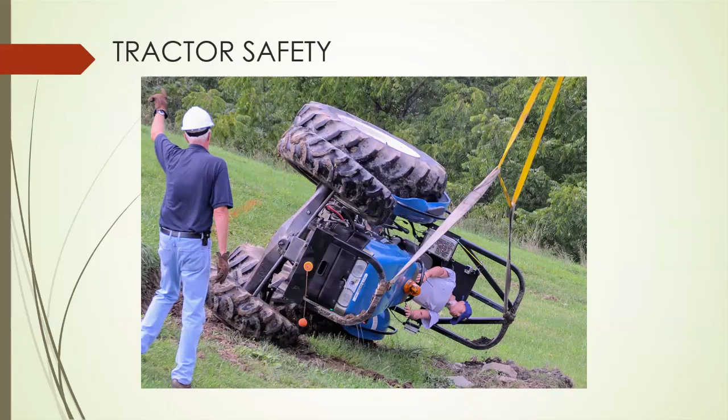According to the National Safety Council, tractor accidents are the leading cause of injury and death among farm workers. Tractors and other transportation related incidents are the number one cause of death on the farm, according to the Bureau of Labor Statistics. Failure to observe safety precautions when operating tractors and attachments can result in serious injury or death. The most common types of serious accidents are the following:

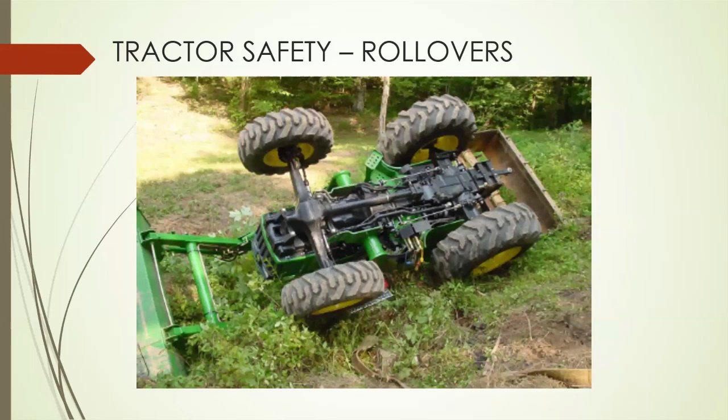Rollovers. The U.S. Department of Labor reports that 44% of farm accidents are due to tractor rollovers. Tractor rollovers are the leading cause of fatalities in the agricultural industry, resulting in approximately 130 deaths per year.

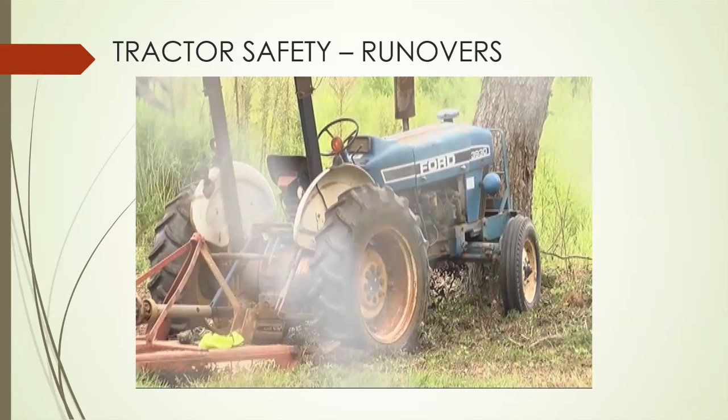The second most common incident with tractors is being run over. This will usually happen when the operator dismounts the tractor to fix a problem and leaves the tractor running without applying the lock brake.

The third most common incident with tractors is being caught in or by moving parts. Many times this involves the PTO, or power takeoff, not being properly guarded.

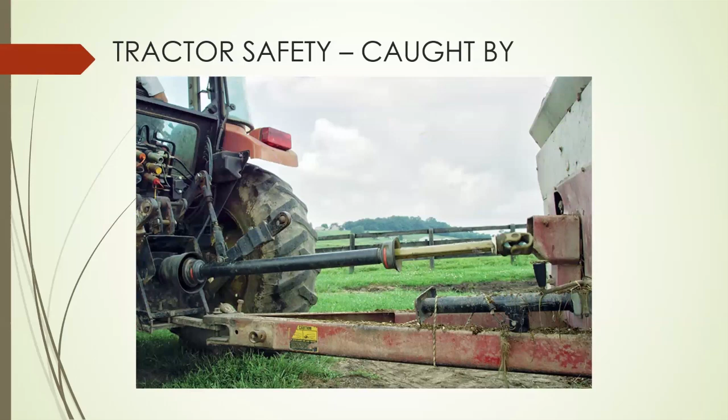Collisions or struck-by is the fourth most common incident involving tractors. Tractors are much slower moving vehicles than automobiles when operating on the highway, and certain precautions must be in place.

Let's familiarize ourselves with the definitions used when related to tractors according to OSHA's regulations under 29 CFR 1928 subpart C.

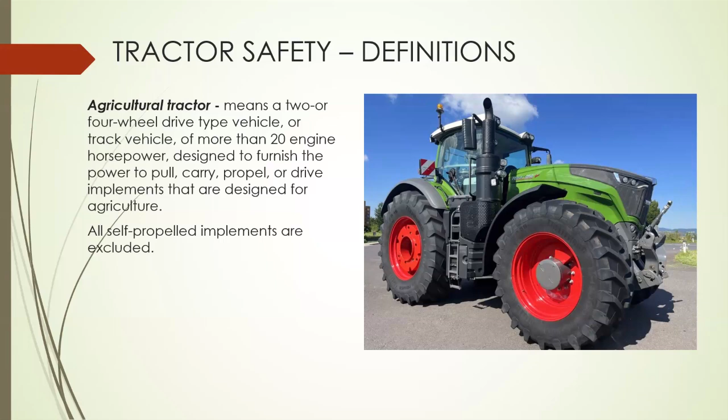The definition of agricultural tractor means a two or four-wheel drive type vehicle or track vehicle of more than 20 engine horsepower designed to furnish the power to pull, carry, propel, or drive implements that are designed for agriculture. All self-propelled implements are excluded.

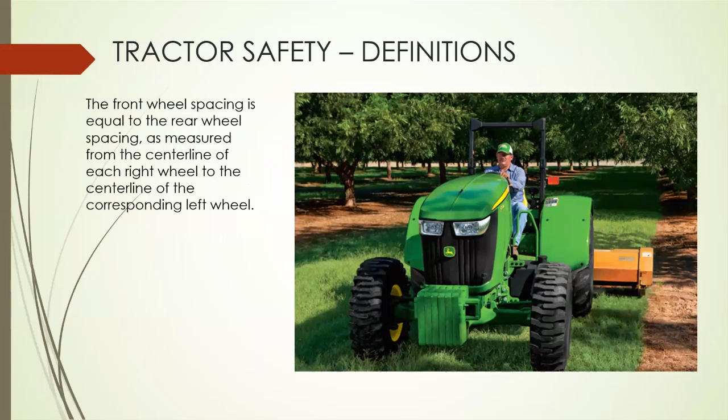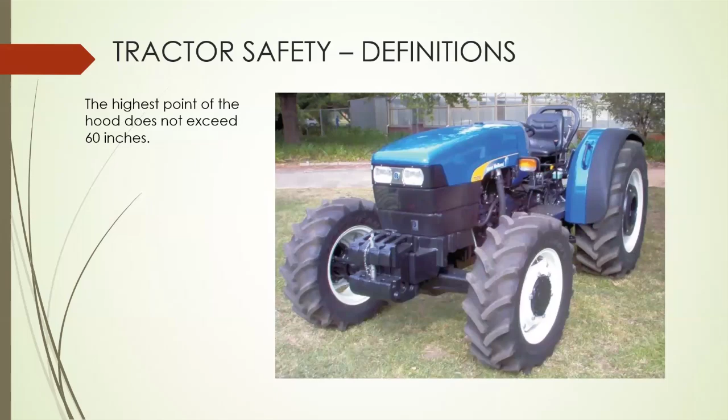A low-profile tractor means a wheeled tractor that possesses the following characteristics. The front wheel spacing will be equal to the rear wheel spacing as measured from the center line of each right wheel to the center line of the corresponding left wheel. The clearance from the bottom of the tractor chassis to the ground will not exceed 18 inches. The highest point of the hood does not exceed 60 inches, and the tractor will be designed so that the operator straddles the transmission when seated.

Now we'll take a look at some general requirements that apply to all agricultural tractors manufactured after October 25th, 1976. The first requirement addresses the leading cause of death with tractors: rollover protective structures. Rollover protective structures shall be provided by the employer for each tractor operated by an employee.

There may be exemptions depending on the type and setting of the work being conducted. If low-profile tractors are used while they're in orchards, vineyards, or hop yards, where the vertical clearance requirements would substantially interfere with normal operations and while their use is incidental to the work performed therein.

Another exemption may be when a tractor is used inside a farm building or greenhouse in which the vertical clearance is insufficient to allow the rollover protective structure that's equipped to the tractor to operate, and while their use may be incidental to the work performed therein.

The last exemption is a tractor used with mounted equipment that may be incompatible with the rollover protective structure. This will include corn pickers, cotton strippers, vegetable pickers, and fruit harvesters.

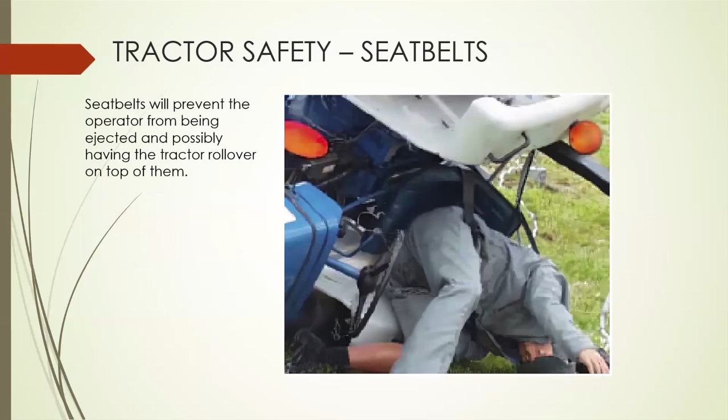Another requirement when operating a tractor with rollover protective structures is seat belts. Seat belts will prevent the operator from being ejected and possibly having the tractor roll over top of them. The employer must ensure that the employee is properly using a seat belt while the tractor is moving so that the operator stays confined to the rollover protective structure area.

Every employee who operates an agricultural tractor shall be informed of the operating practices contained in Appendix A of 29 CFR 1928, Subpart C, and of any other practices dictated by the work environment. Such information shall be provided at the time of initial assignment and at least annually thereafter.

These operating instructions include securing your seat belt if the tractor has rollover protective structure. Avoid operating a tractor near ditches, embankments, and holes. The operator should also reduce the speed when turning, crossing slopes, and on rough, slick, or muddy surfaces.

Precautions should be made to stay off slopes that may be too steep for safe operation. The employer should also inform the employee to watch where they are going, especially at row ends, on roads, and around trees.

The operator shall not permit passengers to ride on the tractor while operating. The operator should also be informed to operate the tractor smoothly with no jerky turns, stops, or starts.

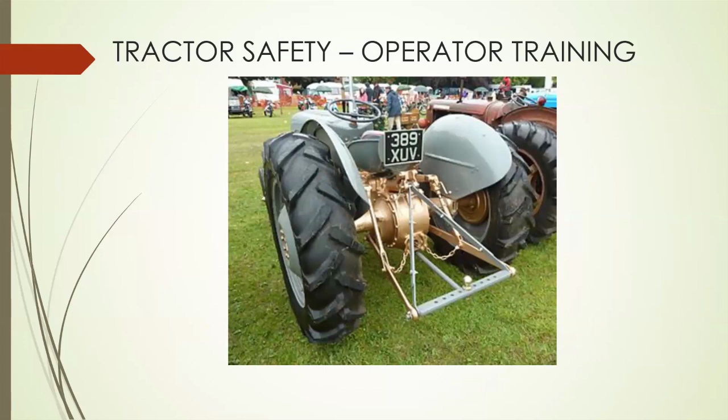They shall also ensure that they hitch only to the drawbar and hitch points that are recommended by the tractor manufacturer. When the tractor is stopped, the brakes should be set securely and a park lock should be used if available.

One of the many uses of a tractor is the ability to power farm field equipment through the means of a power takeoff system or a PTO. The PTO allows the tractor to transfer power to various attached implements and equipment. Tractors used primarily for tasks such as plowing, mowing, tilling, and operating other implements typically come with a PTO as standard equipment.

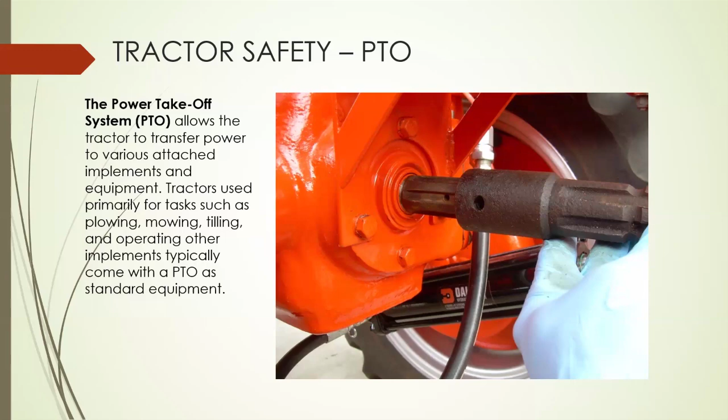The rotational speed of the PTO shaft, often referred to as PTO RPM or revolutions per minute, is crucial for ensuring proper operation of implements and attachments. Common PTO speeds include 540 revolutions per minute and 1,000 revolutions per minute, although variations may exist depending on the tractor's make and model. This type of speed makes the turning of the PTO shaft extremely dangerous.

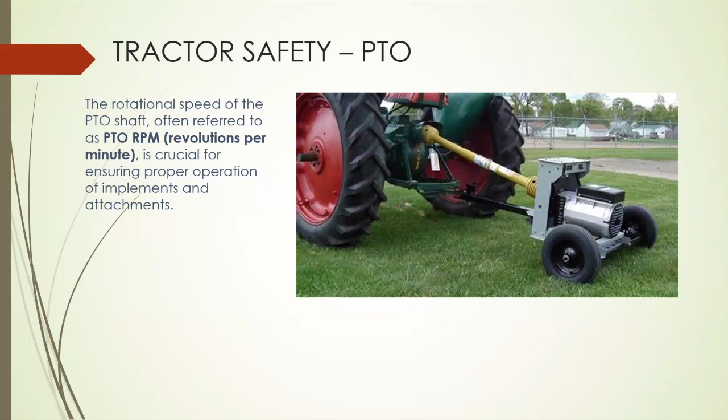Most incidents with PTO systems involve clothing becoming caught in the shaft. Here's a list of precautions one should take when working in and around a PTO system that's in operation.

Make sure that the component is shielded. Regularly test the shields. Ensure that correct drawbar length is used. Always disengage the PTO when dismounting the tractor. If shielding becomes damaged, make repairs promptly or replace before continuing use.

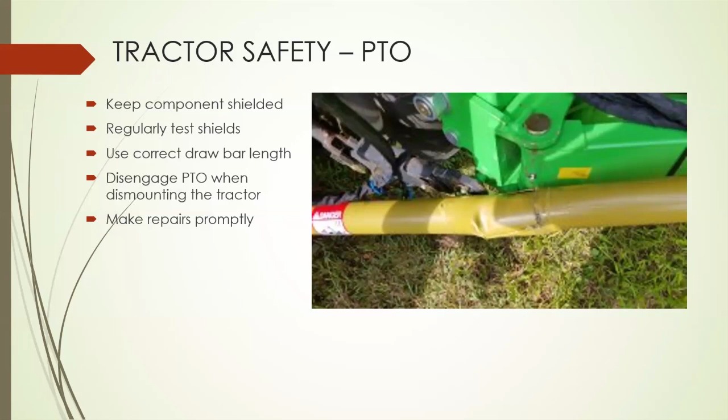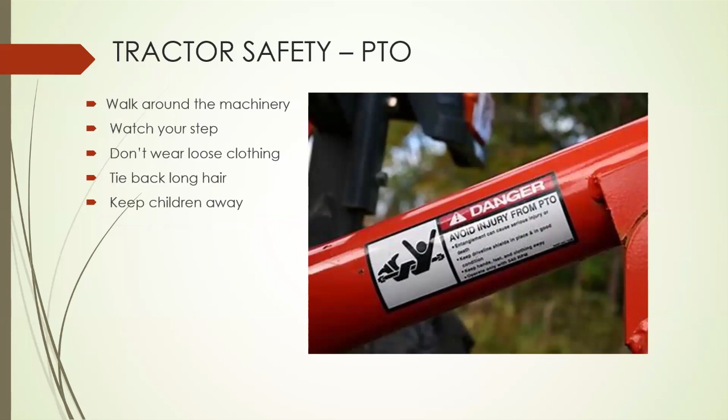Other precautions you should be aware of is to walk around the machine and never try to step over a rotating shaft. Always watch your step and be aware of the terrain. Don't wear loose clothing when operating around a PTO shaft. Ensure that long hair is tied back and always keep children away from an operating PTO system.

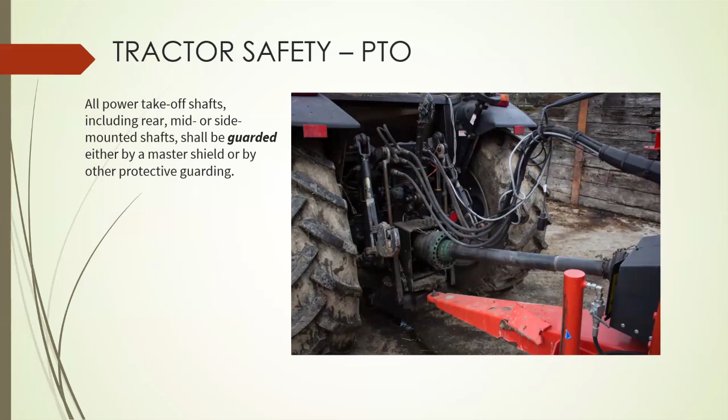All power takeoff shafts, including rear, mid, or side mounted shafts, shall be guarded either by a master shield or by other protective guarding. All tractors shall be equipped with an agricultural tractor master shield on the rear power takeoff, except where removal of the tractor master shield may be permitted.

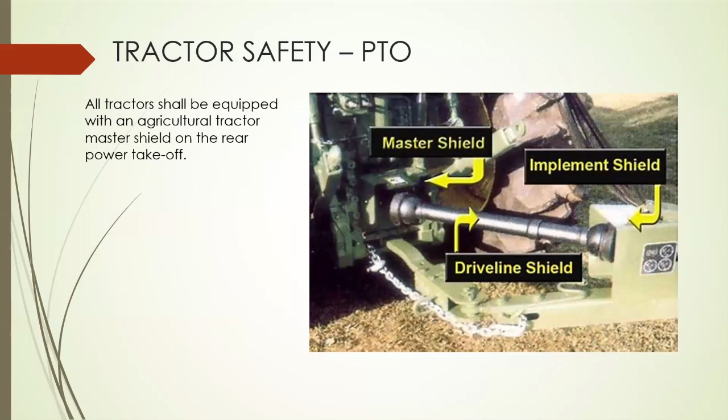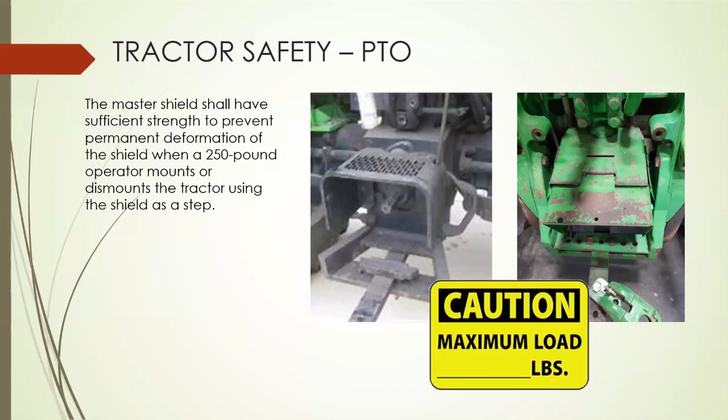The master shield shall have sufficient strength to prevent permanent deformation of the shield when a 250-pound operator mounts or dismounts the tractor using the shield as a step. Also, signs should be placed at prominent locations on tractors and power takeoff driven equipment, specifying that power driven system safety shields must be kept in place.

Now we'll look at tractor safety on highways. Employers should train tractor operators to avoid highways during busy peak travel times or poor visibility, and at night or during bad weather.

Lighting and markings for tractors and towed equipment should be up to date and in accordance with transportation regulations. Tractor operators should consider using emergency flashers and an escort vehicle to increase the tractor's visibility when traveling for extended periods on the highway.

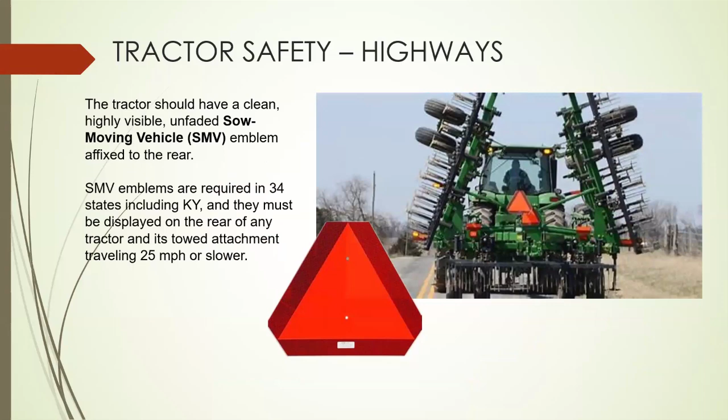The tractor should have a clean, highly visible, unfaded, slow moving vehicle emblem affixed to the rear. Slow moving vehicle emblems are required in 34 states, including Kentucky, and they must be displayed on the rear of any tractor and its towed attachment traveling 25 miles per hour or slower.

In this module, we have covered requirements regarding agricultural and farm activities with tractors, including definitions, hazards associated with these activities, agricultural safety, and the training that may be required to perform these duties.

In closing, employees and supervisors should be aware that all other applicable standards should be followed in accordance with the requirements of the specific standard when tasks or duties make it appropriate.